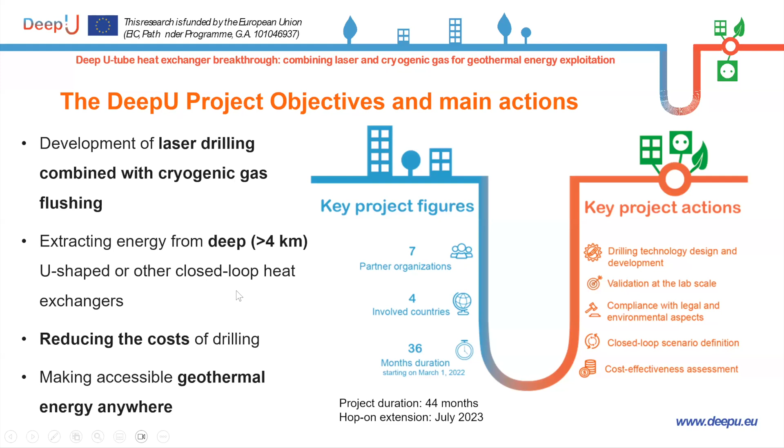The technology itself, you can see on this slide, is a laser beam which regularly gets refocused through lenses in the middle of a drilling shaft, which then opens up at the bottom to heat up the rock and to spall, which means heating up the rock so that it expands and goes into pieces. It will become clearer also in one of the presentations.

And then with the cryogenic gas, which is at the sides of the central tube of the drilling shaft, it's introduced to cool down and to pneumatically transport the drilled particles up to the surface. So this is, in a nutshell, the technology.

Since this is a non-mechanical, non-contact drilling technology, we expect that we would be in continuous drilling operation, contrary to conventional drilling, where you regularly need to trip up and down to replace the drill bit, which gets consumed by the drilling. This would improve the rate of progress on an hourly basis, and would also reduce drilling time and cost.

There is the possibility, which we are exploring, that through the heating of the walls of the borehole and the subsequent cooling by the cryogenic gas, we could form glazed layers, which in certain circumstances could avoid the need for casing, and through that also reduce time and cost. So this is, in a nutshell, the technology and the objectives.

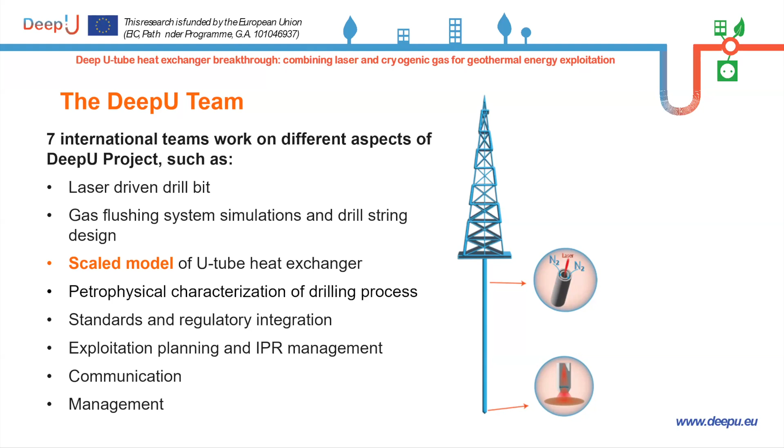The webinar agenda will be: after me, the first speaker will be Kevin Mallin, who is a very experienced person in deep drilling technology. He's been around since, I think, the 70s, so he has lots of experience, and we will cover the state of the art.

This is probably telling you what you already know, but mechanical drilling really relies on putting mechanical energy into a drill string to either churn up soft rocks or break harder rocks. So we apply weight, we rotate it, that breaks the formation into smaller particles or chippings. They are then flushed up the hole. We rotate the bits because we need a round hole, and we need to clean them, and those cuttings get moved to the surface either by fluid, air, or sometimes gas, and that leaves a hole in the ground, hopefully.

So the energy inputs are for lifting, lowering drill strings, rotating, motors in the drill string as well, pumping, compressing air, however we're going to do that system. So the one key outcome always is to make sure we're left with a usable wellbore.

Interesting, I was on a call yesterday with another drilling company, not for geothermal, and they were getting quite high rates of penetration, but their actual overall rates were quite low because they couldn't clean the cuttings. So we have to make sure that when people say 'we're drilling at 60 meters an hour', is that really what they're drilling at? Or are they really only drilling at 10 meters an hour? Because by the time they have to lift off bottom, clean the hole, do wiper runs to make sure the wellbore's clean - that's when we need to understand our rate of progress overall.

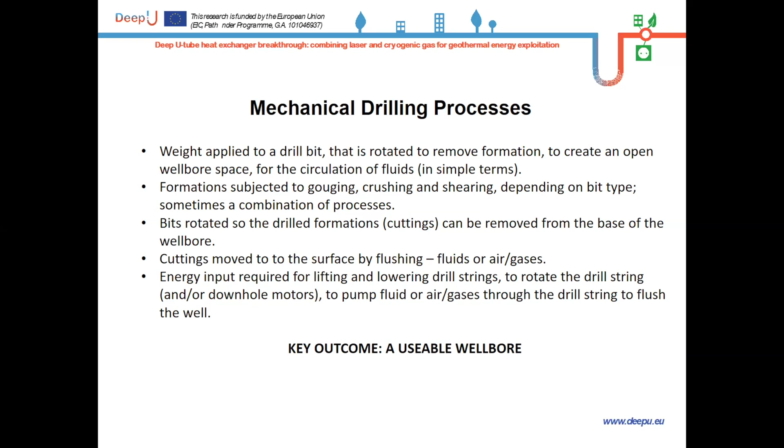Thank you, Antonio. The main drilling technologies currently - there are one or two oddball things around, but generally they're either rotary percussion, normally called down the hole hammers, powered by compressed air or fluids. There's the roller cones, which everyone's familiar with, the Hughes back in the early 20th century perfecting roller cones, and then the fixed cutter. The fixed cutter bit has been around forever - it was probably the first type used when we started making holes by rotating drill strings. We'll go on to talk about fixed cutters in a minute, because they've made a comeback recently in different ways. Next slide please.

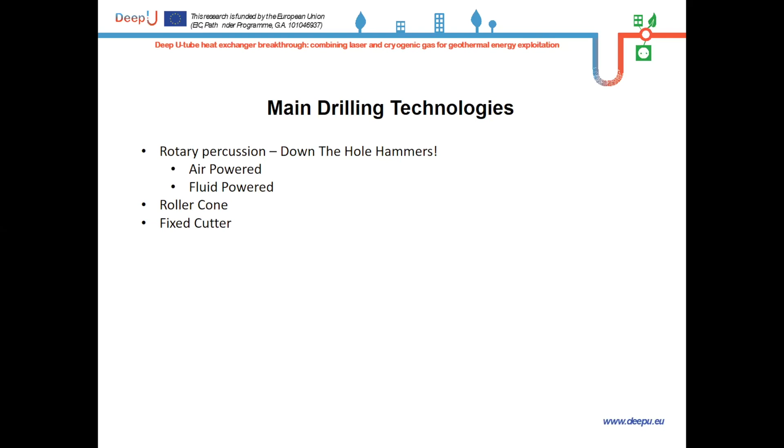Down the hole hammers have been around - Simon Ingersoll invented the down the hole hammer back in 1869, something like that. It's improved exponentially with the ability to compress air. The problem with compressing air is it's highly inefficient, very expensive, so you're quite limited economically to the depths you can drill. You're also limited by some formations - the weaker, less stable formations don't like being drilled with air.

So it's like everything - when we talk about state-of-the-art drilling, there's no one drilling method which will actually do everything. I often compare it to going out to play golf - you don't just take one club, you take a selection of golf clubs so you can play the ball depending on where it is on the course. It's the same with drilling. So it's not a comparative thing we're doing here - we're just showing you what is out there.

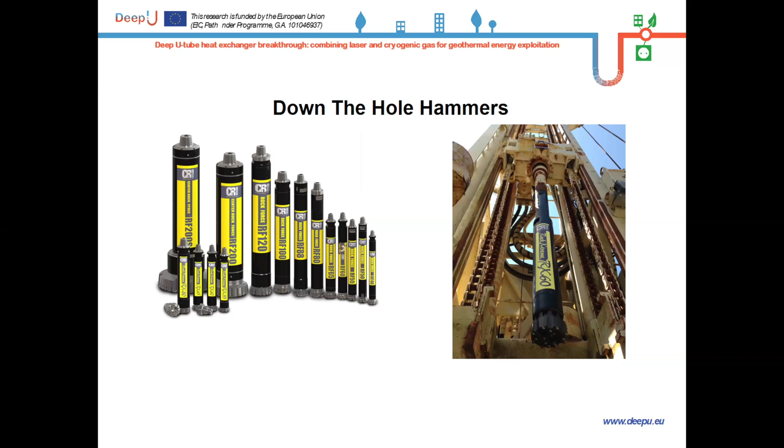These are all familiar down-hole hammer bits. These are Center Rock bits from our oil field days when we did a lot of drilling in the shale gas in northeastern USA. You can see the various shapes of the face - those are so we can direct air flush.

One interesting thing that's come about a lot recently is the increased use of computational fluid dynamics, so we can actually model the flows on these bits a lot better for hole cleaning. And that's not just the air hammer bits - you'll see it with water hammer bits as well.

When you see a water hammer bit, quite often you don't know they're any different. Some people, like myself, save money by using ordinary air hammer bits in water hammers because, for some reason, they are just cheaper.

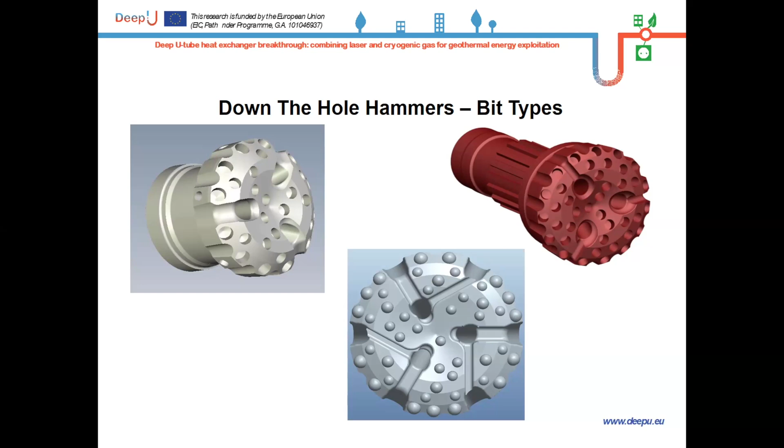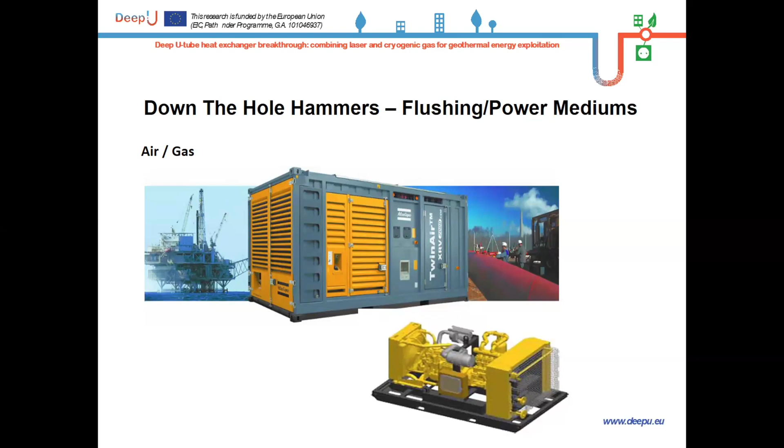It was originally developed because at LKAB in northern Sweden, who mine iron ore underground, the rock is very hard, and they also have lots of water in the mines. So it was developed around the idea: we've got a lot of water, let's compress water, let's look at how air hammers work, and then use high pressure water to power these hammers.

They are great, these water hammers are really very good. They drill very quickly, and they have very little vibration, which is a big issue for some of the smaller rigs. The downside is they want potable water - it's got to be very clean water, you can't have any suspended solids or sands, you can't put mud through them. We do run polymers through them, but even then it's not super efficient for water hammers.

The one thing we've used them for is offshore drilling quite a lot. In fact, on this major roadway on the west coast of Norway from Bergen to Trondheim, we've done lots of drilling offshore with these water hammers, where we just run seawater through them. Seawater isn't the best because it does have some suspended solids in it, but the rates of penetration we get with these hammers compared to conventional drilling methodologies, particularly in the granites up in Norway, offset the cost. So these really are almost single-hole throwaways - we drill the hole and then dispose of the hammer.

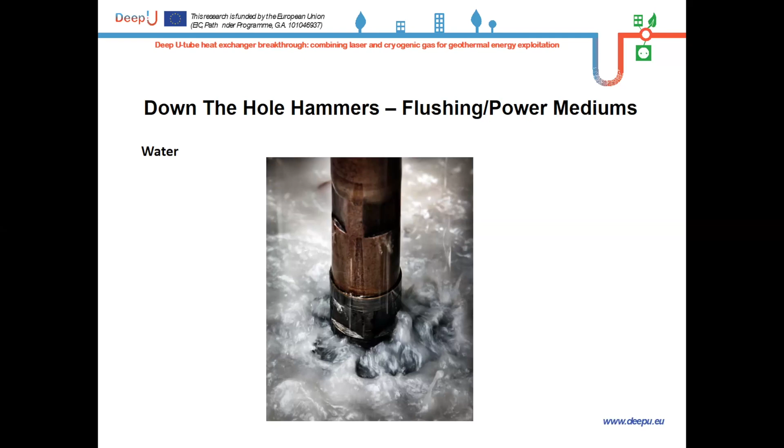There are a few other suppliers of water hammers now, particularly Numa hammers in the US, and Drill King, which is WAI out of Germany. So there's a lot of technology coming in around the water hammer. The one thing I will say is people are generally looking at smaller sizes because of the issue with needing clean water, so they've tended to concentrate on the smaller size hammers.

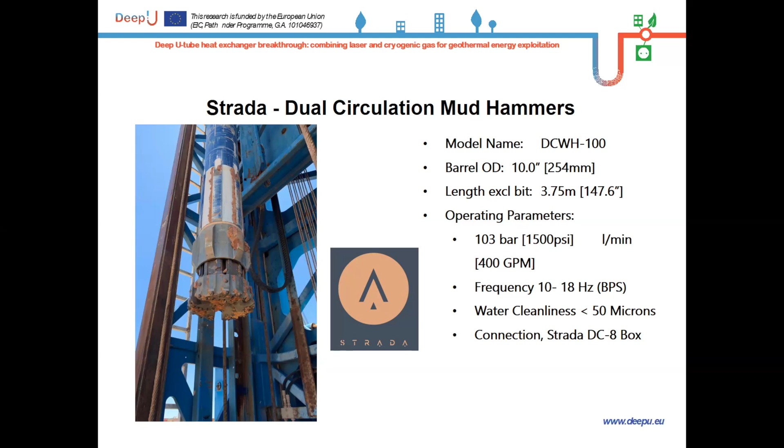The only real downside of it is that it uses a special drill string. Other than that, it's a great way of drilling holes.

This is a sort of hybrid between standard rotary and percussion drilling. They'll run a percussion bit on the end, and the system has a piston in there, the jarring piston, which adds additional energy to the bit.

Some years ago - the actual concept has been around for quite a long time now - Atlas Copco back in the day ran a thing called PARD, percussion assisted rotary drilling, where they took a down-the-hole hammer, machined special chucks so you could screw conventional rotary bits into them, and you'd drill with a tricone. They only used tricones with a down-the-hole hammer.

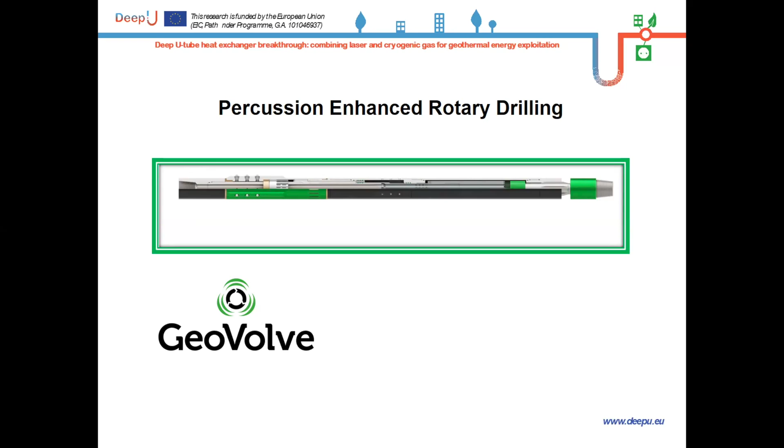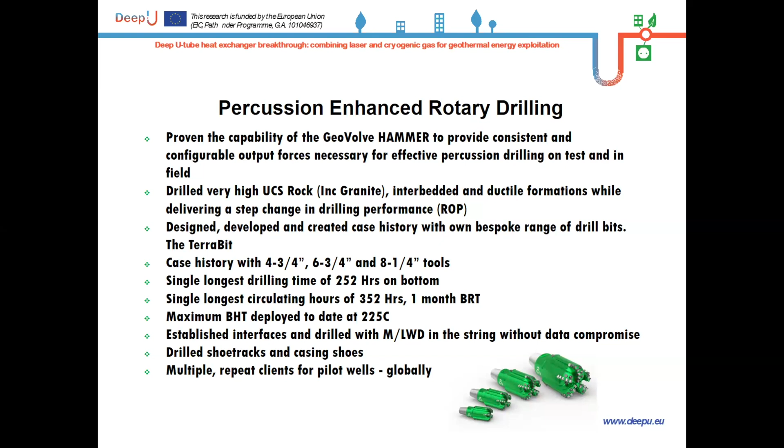Here we are - I hate to say it, but these, since Howard Hughes, way back in the day in Bakersfield, California, secretly worked on making these tricone bits, they are still very much used in our industry. So although we call them state of the art, it's stuff we've been using now for well over 100 years - almost 130 years now.

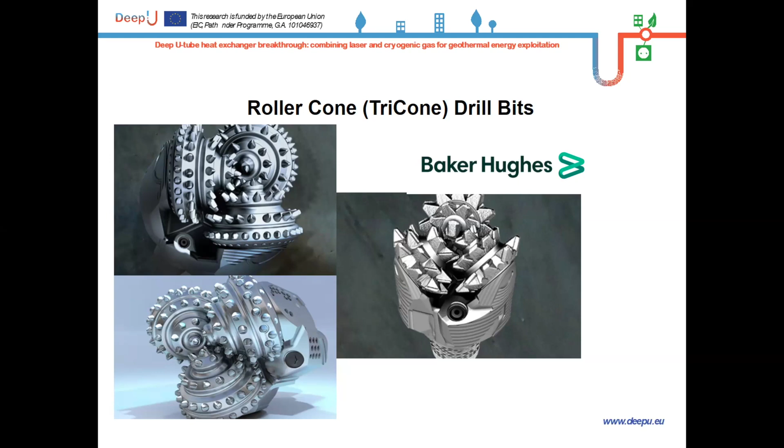Nowadays, with the increased way they're building these bits, it's allowed them to drill in very much higher strength rocks - granites in particular, in the Western USA - they've done a lot of work recently. I do hear lots of people say 'oh, this is new technology' - it's not new technology, it's old technology, newly applied, to be honest. So it has changed the way we're drilling granites.

But whether we see the overall efficiencies that we're going to see from systems such as the Strada mud hammer remains to be seen. These are still early days, probably 2 or 3 years now that we've been pushing these bits in a very different way.

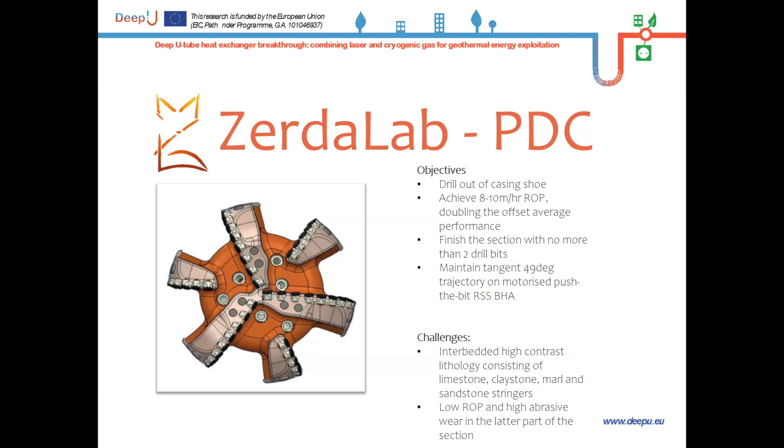So it's worth, on the deeper holes, looking at the PDC. And as I say, in Western USA at the moment, on the Forge project in Utah, and I think there's a hole going on in Oregon at the moment, which is quite high temperature, 350 degrees I think, they will be using PDC bits.

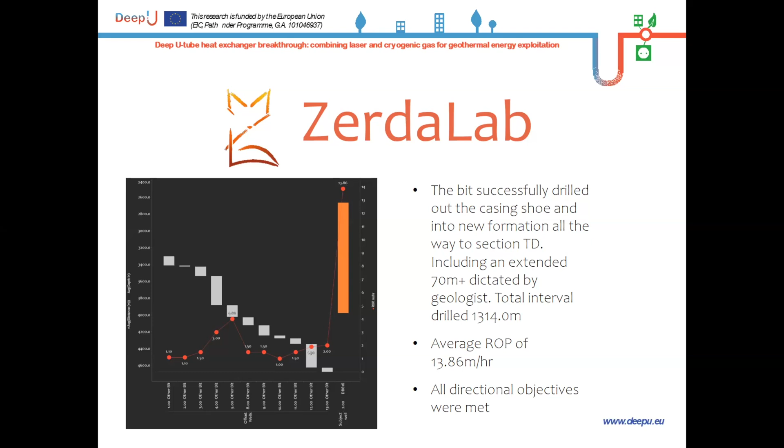That's just a slide from ZerdaLab showing a particular section they drilled. So ROP of 14 meters an hour, roughly, that's good. This is, when you hear about traditional drilling in granites, you're talking 1 to 3 meters an hour. And I know from jumping back to Strada, they're getting sort of around 10 to 12 meters an hour on some very big hole sizes as well. So in granites, it brings tears to your eyes.

Right, this is not actually a drilling technology, the sort of actual drilling technology that breaks rock. This is the RSS, the rotary steerable systems. This is really starting to revolutionize geothermal drilling in particular. It's been around for a long, long time in oil and gas. The RSS is a development of the directional drilling systems. You can actually steer this, it's like driving your car almost. You can take it wherever you want to go. And you'll see on the end they're using a PDC bit, like the one before. And we can go from vertical to long horizontals.

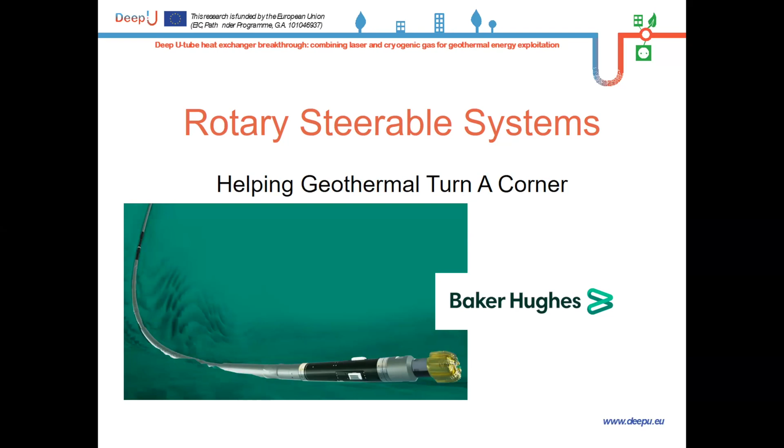This elongates the amount of rock that's exposed to the fluid that you want to heat and extract in a geothermal system. For those of you interested, there's a company out there called Eavor Technologies, and they are running what they call this underground radiator system, where they're drilling lots of very long horizontal sections and linking them all together so you have sort of long tubes. They are using RSS.

One thing, it is an expensive method, so you have to consider it as part of your overall drilling program. So that covers off where we are with the technologies. They're not all of the technologies, we don't have time, and we could spend probably a day talking about each individual one as we go. But those are the key ones: we're still using roller cones, we're still using down the hole hammers, either air or fluid, and we're now reutilizing PDC fixed cutter bits in harder formations.

So that covers off those sorts of technologies. And now we go into the non-mechanical. I'll be honest, there's no commercial non-mechanical technologies. I mean, there are companies doing some drilling, but no one's drilled to great depths, and I'd say over 200 or 300 meters yet with these non-mechanical technologies. All the ones we've been talking about, they've existed since the late 1960s, but they're still not fully commercial. There's been a lot of research, and I'll show you in a minute some of them. But how they leave a hole in the ground is still quite debatable.

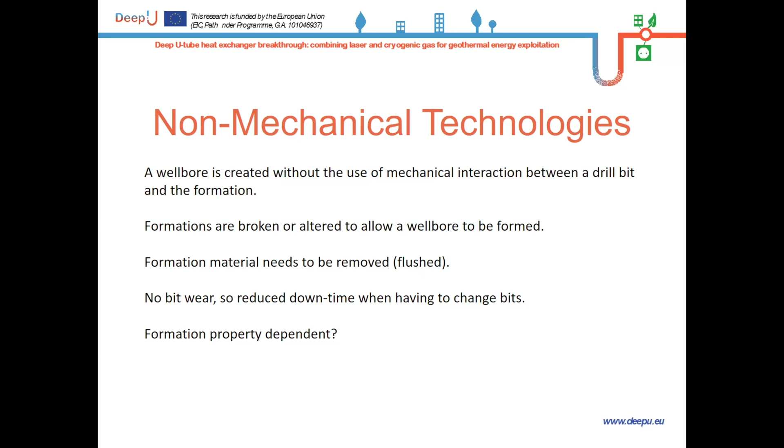Right, these are in no particular order. Electro-pulse boring, this is where you put a high voltage shock and pulse it into the rock, and it fractures the rock. It's a bit more technical than that, and I'll introduce you to a paper in a minute. There's a plasma technology from a company called GA Drilling, which stands for Geothermal Anywhere. Hydrothermal spallation, and super deep fusion drilling, which I have no idea what that means.

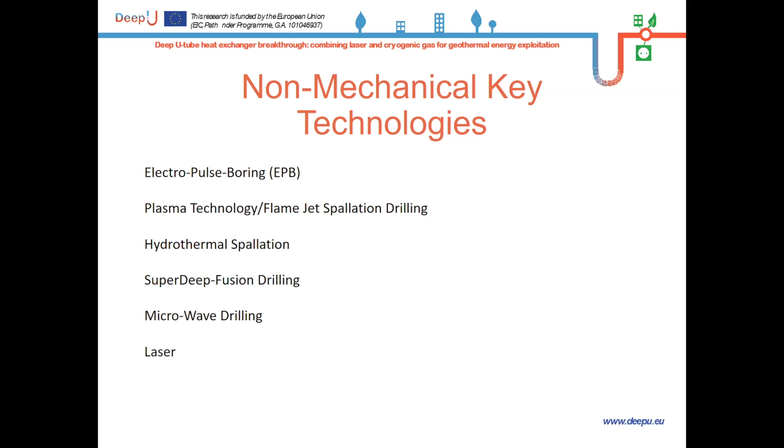Couldn't find anything on it, but it was mentioned in a paper in 1968. The microwave drilling, this is being made quite topical by Quaise Energy, who are planning to drill their 20-kilometer deep wells in 100 days. And then, of course, we've got the laser, which Pavel will talk about in a few minutes.

Next slide, please. So there's a reference there to a paper which talks through what electro-pulse boring is. They have drilled quite a few holes now to around 200 meters. The interesting thing is they're drilling quite large diameter wells, at 500 millimeters, or half a meter diameter. So going deeper with electropulse boring could be very interesting because it can drill quite large holes, and you can then flow much more fluid through these wells with lower pressure losses.

And that's it - it applies an electropulse to the formation and hence energy. Once you impact energy into the rock, it will change the status of the rock, break it up, and then you have to flush it away.

But I do urge you to search out and find that paper. It's open source now, so take a photograph of that, search it on the internet. It's very, very interesting. I think the paper is from 2012, a cooperation between some folks in Norway, Germany, and China, I think. It's well worth reading, because like everything, if it works, it's going to be an amazing step forward. It's a long way from working yet commercially, I think.

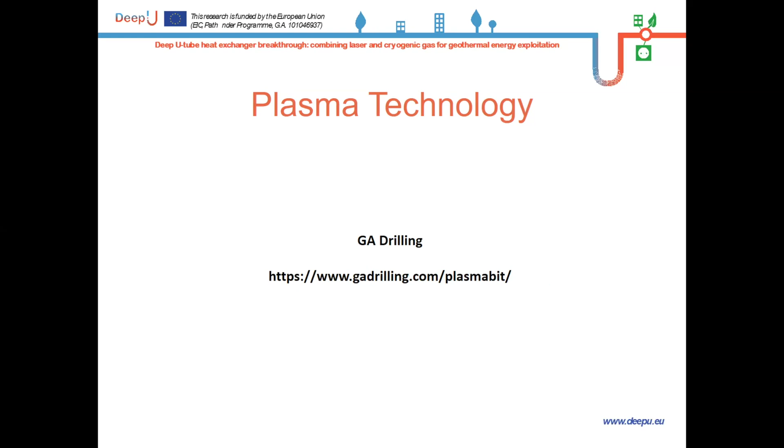Thanks, Antonio. Next, then the microwave - I just copied this verbatim from the Quaise Energy website. So they're using a gyrotron-powered drilling platform, and they evaporate the rock. So read into that what you will. They have been talking for a few years now about how they're going to drill some very, very deep wells, 20 kilometers, in 100 days, which would be very, very impressive.

There's lots of things we also have to consider when drilling much deeper - all the geomechanics of the rock, how the rock behaves when you drill a hole into rock that's being compressed under 12 kilometers of other rock. What's going to actually happen as you go into these much deeper formations.

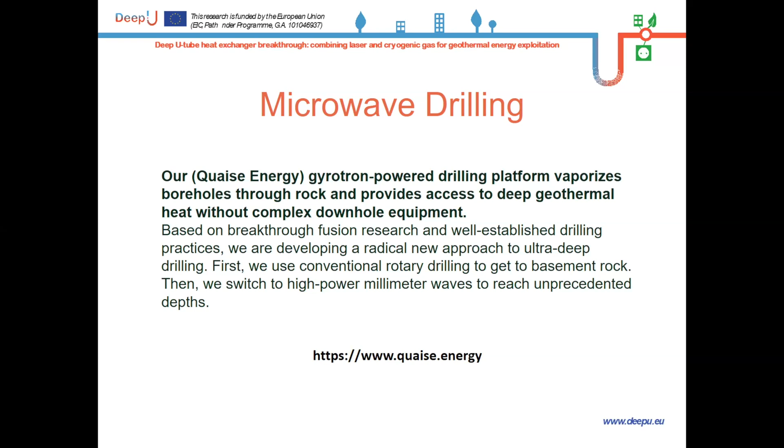So as you see there, what they're doing is they're going to actually use conventional rotary drilling to get to basement. That could be anywhere - say in Cornwall, some of the basement is at surface; in the Baltic Shield in Scandinavia, it's at surface; other parts of Europe it can be at sort of 3,000 to 5,000 meters below the surface. So when they say they're going to use conventional drilling, that depth range could change from 0 to 5,000 or 6,000 meters.

So again, just go onto their website and take a look. Then we come to laser drilling, which is what today is really wanting to look at, and the work that DeepU are doing, and the reasons why we're looking at lasers - because as we go deeper, there's going to be a need to try and avoid using mechanical drilling methods, because of the physical restraints we have with wearing things out.

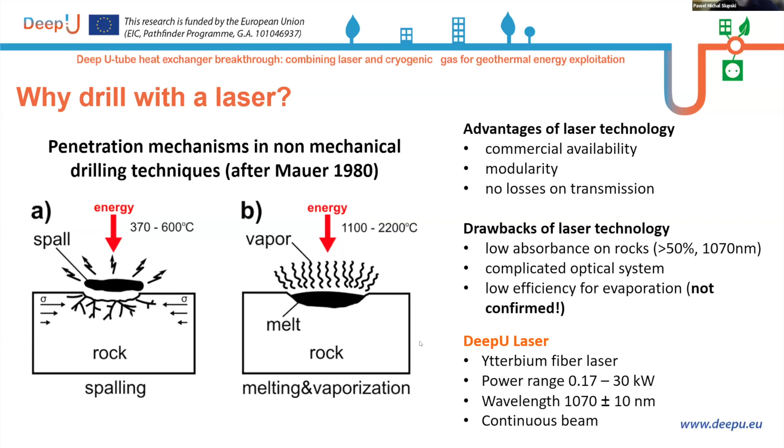What are the main laser-rock interactions, and what they depend on for geological materials such as rocks? We have absorption and reflection, the most important parameters, as the ratio of those two controls the amount of energy actually being absorbed by the rock that can cause interaction. In case of granite, we have around 54%. There are, of course, secondary processes—scattering, transmission—but they do not play such a significant role in laser drilling.

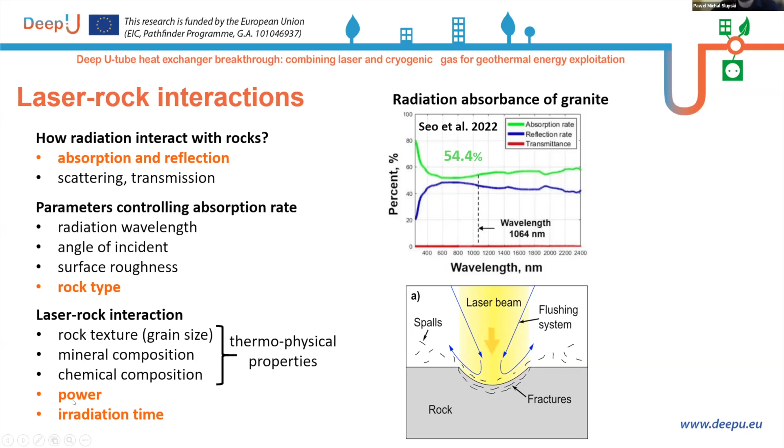Those parameters we can describe, but we cannot do much about them. What we can control is the power and irradiation time, so we were mainly focused on better understanding the impact of those two parameters.

To understand how rocks interact with a laser, we designed three types of experiments: linear laser tracks, which basically performed constant irradiation alongside the track while increasing the distance, effectively reducing the power density delivered to the surface, so we could observe its effect on the rock as the power density changed.

Then the punctual tests were mainly focused on understanding the effect of irradiation time on laser drilling, and finally DeepU drill head tests—tests that we planned to solve the technological and technical problems of perforating the rocks.

The lithologies we selected can be divided into primary lithologies such as granite, sandstone, and limestone, which we investigated heavily with various experiments and techniques, and also characterized the rocks themselves. And secondary lithologies such as gneiss, basalt, slate, and migmatite, which were used to verify very specific aspects of the interactions, and hopefully in the future we will also study them more.

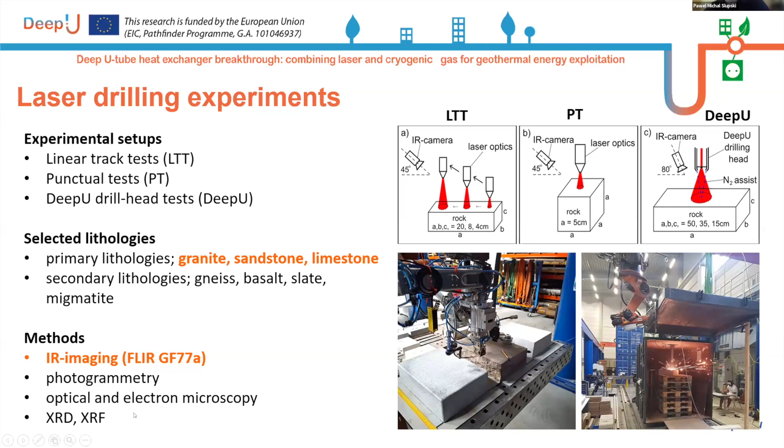The methods we used to investigate were infrared imaging and thermocamera for monitoring the laser drilling process, and for further understanding of the outcomes, we used photogrammetry to study the morphology of the craters, and generally for lasing products, optical and electron microscopy, and for chemical and mineralogical composition, X-ray diffraction and X-ray fluorescence.

So here we can see generally some of the results and outcomes of the linear track tests and punctual track tests, where we could observe the phenomena occurring depending on the power density, power, and irradiation time. What we expected is initially the spallation starts, then we move to the melting regime, and finally we can see the vaporization of the rock.

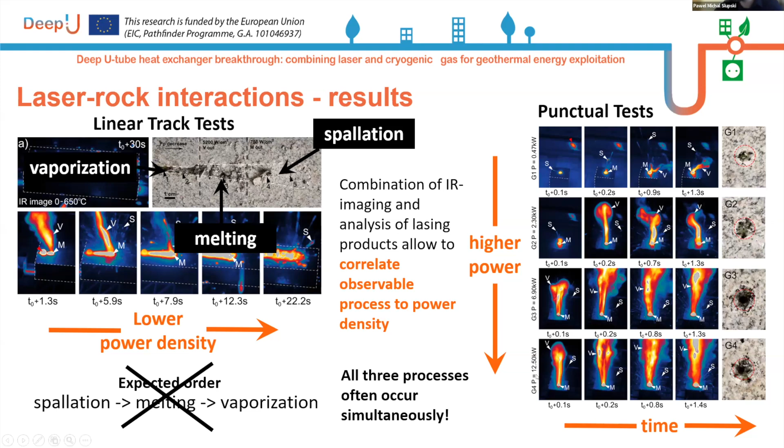However, we could notice, which is also well pronounced on the lasing product, well consolidated glass within the vaporization region. Then we can see some melting evidence. And as we reduce our power, effectively power density, we can see only spallation. However, close examination of the infrared imaging has demonstrated that all three processes often occur simultaneously, to different intensity.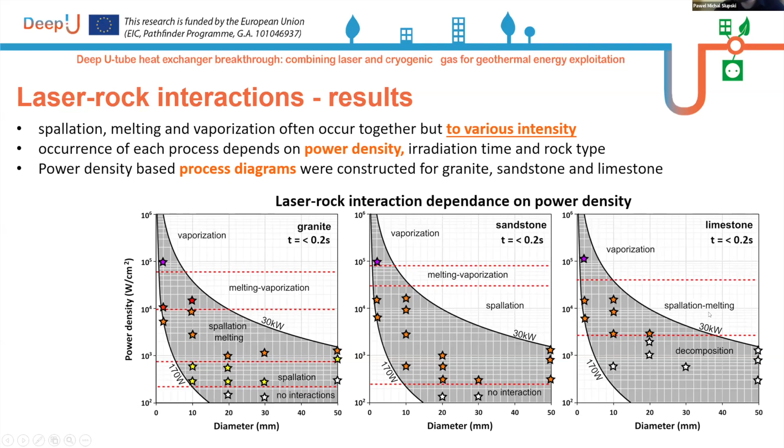What we can see here is that generally granite is relatively easy to melt. We can see that our quartz-rich sandstone generally spalls even at very high power density, while limestone needs much more power density even to initiate the spallation, and at higher ranges, melting.

So what are the implications of these process diagrams? They are actually the possibilities of application of lasers to drill useful boreholes. For instance, at the moment, we managed to drill approximately 10 centimeters. We are able to drill around a 10 centimeter borehole within this range, as we can see the black line that corresponds to our current maximum power output.

And therefore, we are planning to increase the power to 120 kilowatts, which will allow us to drill with thermal spallation. In that case, the diameters go to around 20, even higher. However, when we consider the melting vaporization process, as we can see, even at extremely high powers, such as 1 megawatt, it will be very difficult to drill useful diameters with a laser.

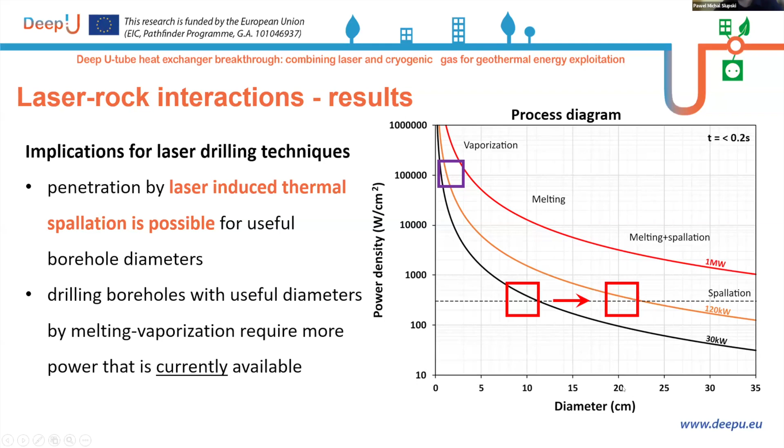So at the moment, the melting and vaporization require much more power than is available. Therefore, we cannot expect soon to drill useful diameters for geothermal purposes.

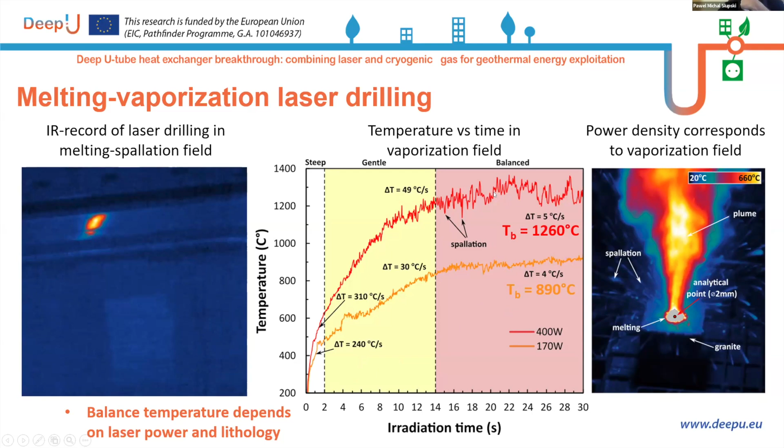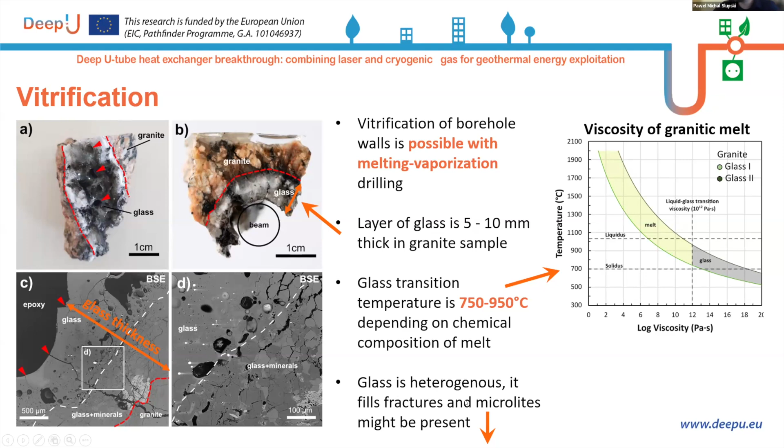As mentioned, it's heterogeneous, so not necessarily completely homogeneous. It may contain relics of unmolten phases, as we can see in quartz. This melt often fulfills and completely fills the fractured zones still present in the rock, basically sealing and improving the porosity. It might also contain solid phases that crystallize during quenching, such as microlites, in that case magnetite. The main question is what are the mechanical properties of such a laser-generated glass?

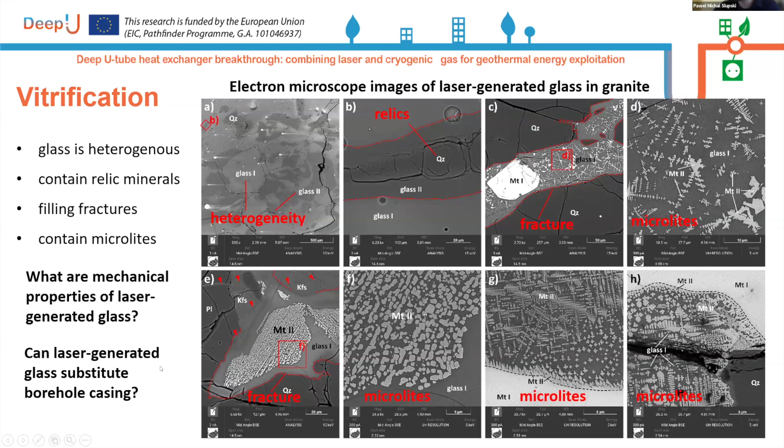We still haven't investigated that, and whether laser-generated glass can substitute borehole casing. As we know, glass is known for its very high uniaxial compressive strength. However, due to its complexity, it's very difficult to model, so we would try to address this question in the future.

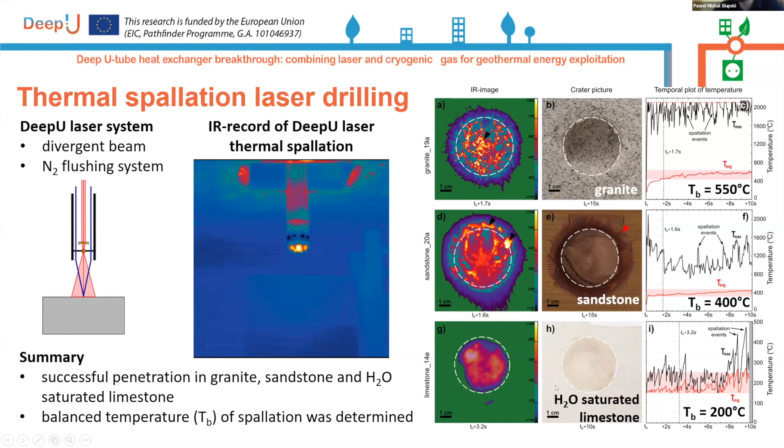It's important to notice that, according to the previously shown diagrams, we lack the power to activate or initiate thermal spallation in dry limestone, which leads to subsequent melting and very low penetration. Therefore, we tried with H2O-saturated limestone, and we were able to thermally spall it at a very low average temperature.

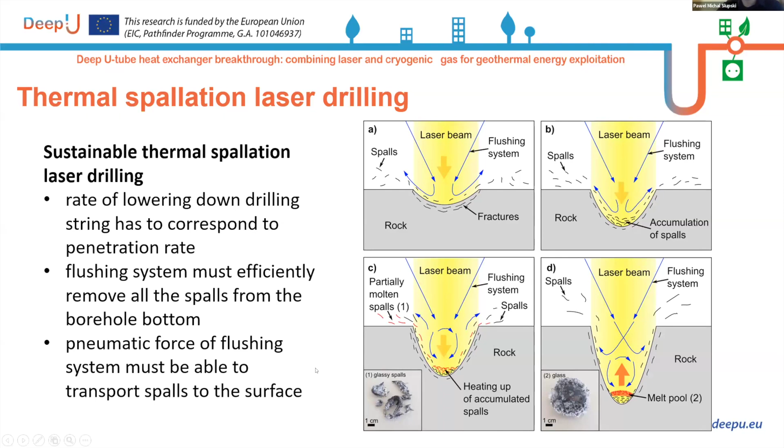How to sustain thermal spallation and stable penetration? The most important aspect is basically the efficient flushing system, as drilling with thermal spallation usually demands drilling at the highest possible power density. Therefore, if particles are trapped at the bottom of the drilled borehole, they may eventually melt, leading to formation of glass, or in extreme cases a melt pool at the bottom. This liquid form is highly reflective for the radiation, and basically changes the drilling regime from thermal spallation to melting, effectively stopping penetration via thermal spallation. So that is the importance of the flushing system.

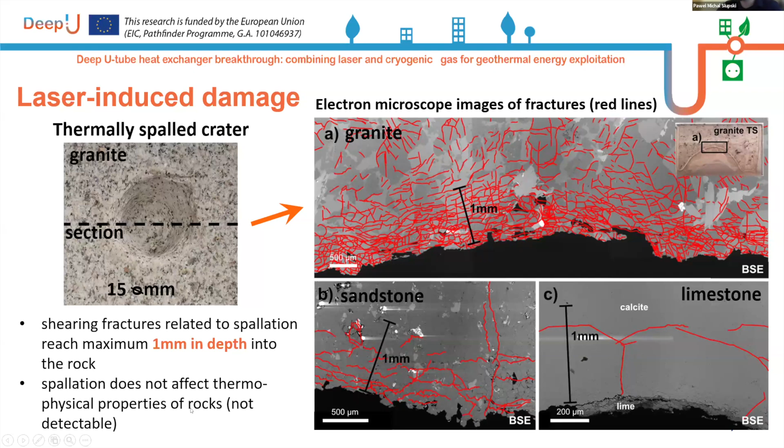What actually happens with the rock itself? I said that macroscopically it's a very clean cut. However, under the electron microscope, we can see a number of shearing fractures generated very close to the crater surface. Here we can see the bottom of the borehole in granite, sandstone, and limestone, and we can see those shearing fractures parallel to the borehole walls reach a maximum of 1 millimeter in depth into the rock. Therefore, thermal spallation does not affect the thermophysical properties of rocks, or at least we were not able to detect such a change with our current instruments.

A few words about the efficiency of laser drilling. We used some parameters: the rate of penetration, defined by the depth of the borehole divided by the irradiation time, and also specific energy, power multiplied by irradiation time per volume of rock removed. In that case, we have to underline that this specific energy can currently only be used for fiber laser drilling, as it wasn't normalized and corrected for the absorbance-reflectance ratio, which I mentioned in the beginning.

Looking at our experiments performed for thermal spallation with a 5 centimeter diameter borehole, we can reach a rate of penetration around 10 meters per hour for granite, around 15 meters for sandstone, and for wet limestone around 5 meters per hour. We see a very significant drop for dry limestone. As I mentioned, it's related to not sufficient power to initiate thermal spallation. Therefore, we have melting, much higher specific energy, and low rate of penetration.

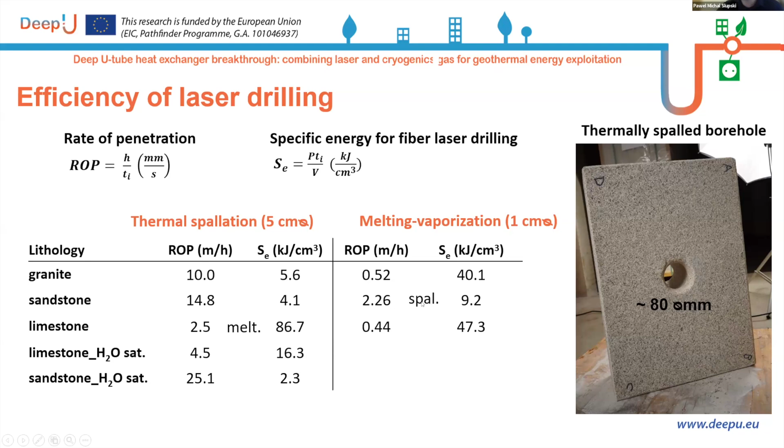So quickly, to visually summarize our results, we have laser drilling that may work in two different regimes: melting vaporization and thermal spallation. Therefore, we can propose two different setups or technological solutions: thermal spallation, which we currently can successfully apply for drilling purposes, and melting vaporization, which is probably a matter of the future, as we need significantly more power to drill larger diameters. However, both techniques have their advantages and disadvantages, such as the vitrified layer for melting and a very high rate of penetration for thermal spallation.

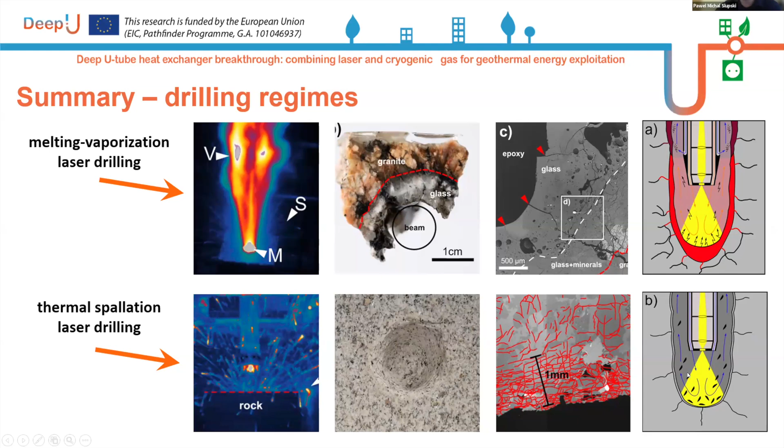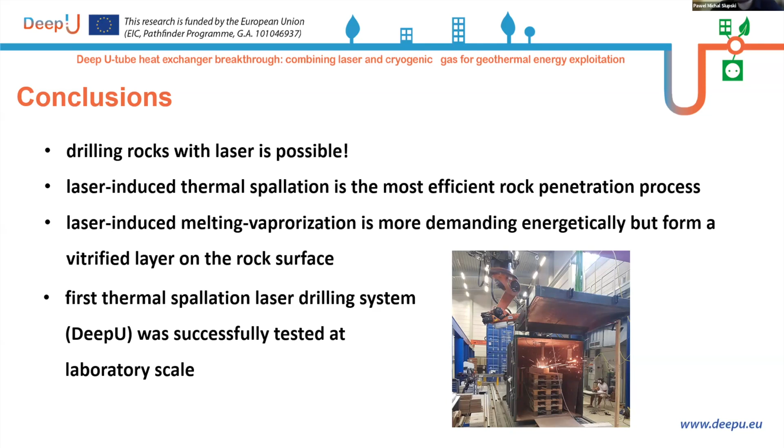So the main conclusion, answering the title question, is that drilling rocks with laser is possible. It's not anymore science fiction. However, at the moment the main regime is laser-induced thermal spallation that provides rock penetration, and melting vaporization is much more energetically demanding. However, it can form a vitrified layer that could work as casing in the future for some selected lithologies. We have successfully tested the DeepU laser drilling setup at laboratory scale, and we're looking forward to continuing this work in the field and further developing the drilling system.

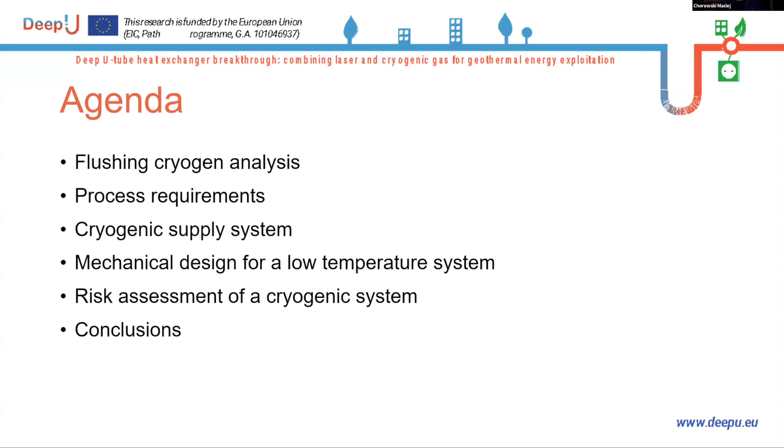I will try to make my presentation short because it follows some suggestions and conclusions from the previous ones, which were very informative. First of all, we would like to focus on the laser drilling cryogenic system, with a short discussion concerning why cryogen, what are the process requirements, how to design the process of cryogenic supply, what are the mechanical challenges, and finally what can go wrong in such a robust but nevertheless still complicated system as we would like to propose.

First of all, to be efficient with flushing—and Pawel stressed very strongly that it is very important to remove all the cuttings from the bottom of the borehole—we have to supply fluid and we have to remove it. After some basic considerations concerning the thermodynamic nature of the flushing fluid, safety of the operation, and chemical stability of the compound to be used, we decided to go for cold nitrogen, cryogenic nitrogen, chosen as the most suitable candidate for flushing medium. This means that from the surface we have to deliver cryogenic nitrogen down the borehole, up to several kilometers, turn its direction, remove heat, remove the cuttings from the bottom, and take them to the surface. So it's a multi-purpose task for this cryogen.

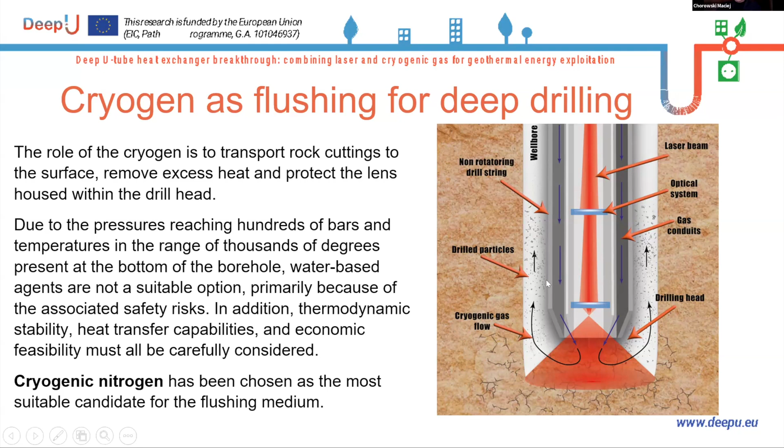It's not only the nitrogen that was chosen, but it also has to be decided what should be the entrance parameters of this gas. Taking into account that we first have to have the flushing medium with a sufficiently low temperature to accommodate heat, the direction is cryogenic. Cryogenic means a temperature of something like 120, maybe even less, Kelvin—in Celsius, minus 150 or even more. Liquid nitrogen could be a good choice, but it will not be possible to keep it in this two-phase thermodynamic state if the pressures exceed about 30 bar.

We can expect such high pressures, or even much higher, down the borehole due to hydrostatic pressure and due to pressure drop in the return channel. So the only reasonable choice is supercritical state.

Supercritical means single phase, high density, low temperature, but not well defined, because as a single phase we do not have a stable temperature—if we add some heat, it will go up. So supercritical is not a point like state, it's rather a region, and we see that we go towards higher pressures, even several hundreds.

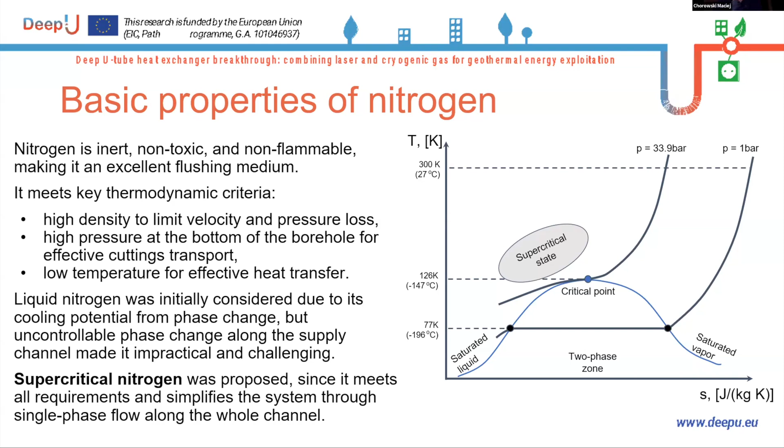So supercritical nitrogen was proposed since it meets all requirements and simplifies the system through single phase flow along the whole channel. We do not have to use phase separators. We do not care for two-phase flow, heat transfer coefficients which are difficult to identify for two-phase flow, or two-phase flow pattern. We go for a simple system, but nevertheless, from a technical point, very challenging.

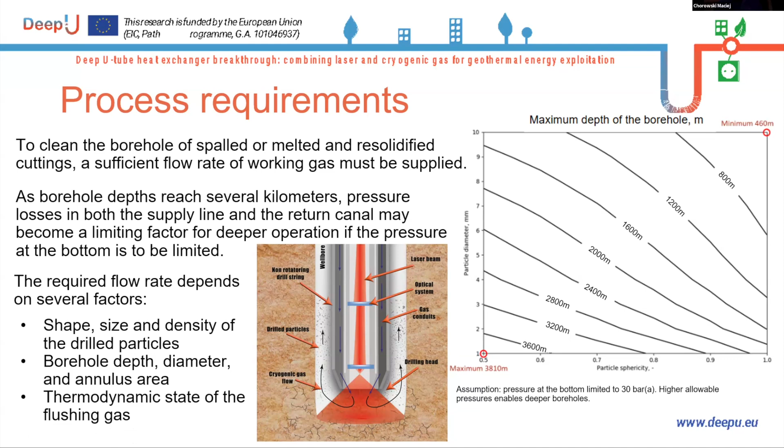So that is to demonstrate that we control the required amount of nitrogen to be circulated through this system with respect to the nature of the cuttings that are to be removed, and also with respect to the diameter and depth of the borehole.

And well, it has been demonstrated by modeling that supercritical nitrogen is essential to maintain an adequate mass flow rate despite significant pressure drops in small process pipes, and to prevent the formation of two-phase flow. So it seems that it should work even for very deep holes reaching over 4,000 meters.

Nevertheless, as in any modeling, we had to take into account many assumptions. We have decided to construct a dedicated test rig to test the model. Here you see the warm part of it. It will be used—or it is now under final stage of commissioning, so it is already in use—to check first of all the transport properties of debris, of cuttings, and to check if the model is adequate and can be used as a reliable source of information on what is a really required nitrogen flow through the system. So our methodology is to model, to calculate, and to validate the model, at least for the basic input parameters.

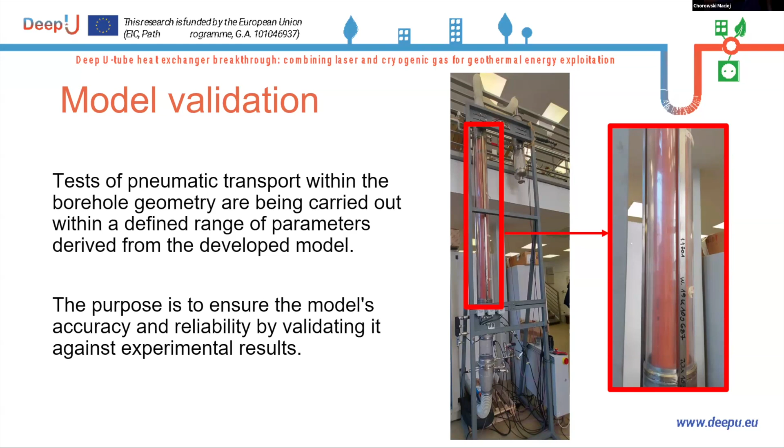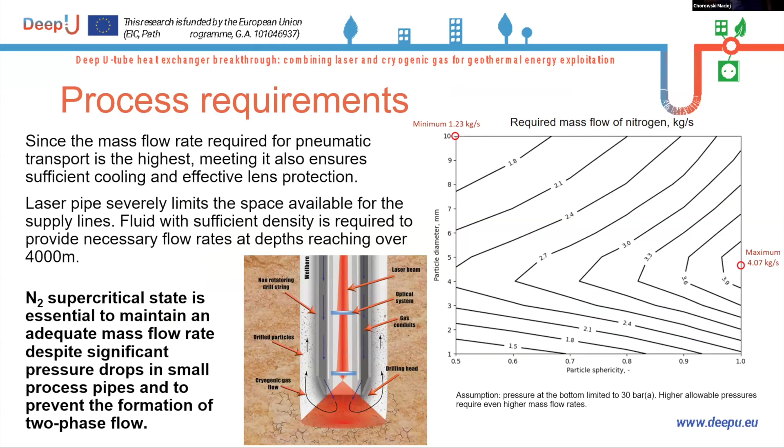When we look at the cryogenic system, it starts from the source of liquid nitrogen, because what you find on the market is liquid nitrogen. We remember that we are not talking about peanuts, because we will require something like 3, 4, or 5 kilograms of liquid nitrogen per second, which means tons per hour and tens of tons per day. So it must be an industrial system. We supply either from a separation unit or from delivery by trucks.

We store it in liquid form. We compress to the required pressure by a cryogenic pump. As we compress the fluid, it is not a high energy consuming device—roughly speaking, we consume something like between 5 and 10% of the energy that would be required to compress gaseous nitrogen. So we save energy because we compress the fluid.

It is still at low temperature if this compression is in adiabatic condition. We go to the drill string and down with this supercritical nitrogen at a temperature of about 120 K with pressure. We have calculated that having very deep boreholes, and having to assure sufficient nitrogen to remove the cuttings and sufficient to withstand the pressure drops during the return in the return channel, we can expect working pressures up to 350 bars. So a high pressure, relatively high pressure industrial installation.

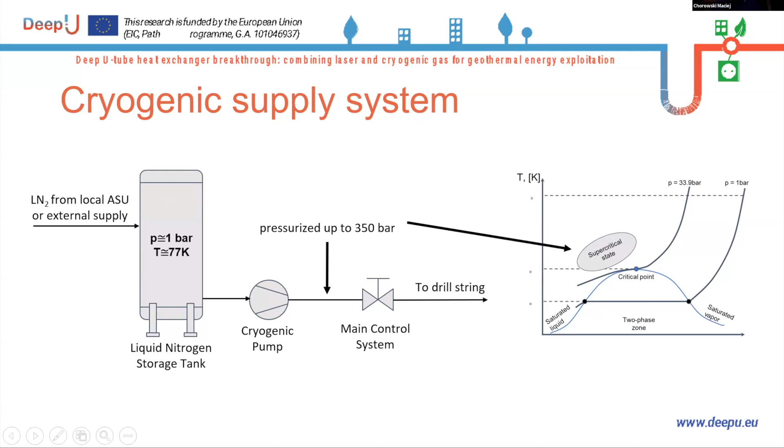And now we are coming to the basic technical challenges and some innovative solutions that have to be proposed in cryogenic engineering, because it is not a big amount of cryogen to be supplied—something like kilograms per second.

We have it in industrial applications. The length of the transfer lines of kilometers are also not exceeding the state-of-art technology.

But what is completely new here is that we are going down the borehole. So we have to use the channel, denoted as blue line, supplying high pressure nitrogen, robust with sufficient mechanical stability. It is proposed to be a spiral one, so self-compensating. We avoid the necessity of using bellows.

We are not able to avoid it in case of laser beam pipe with optics, due to different thermal contractions depending on the temperature. The return annulus channel will be separated thermally by vacuum insulation. So we have to incorporate high mechanical stability of the input channel, vacuum insulation, and a return channel with the ability to take the cuttings.

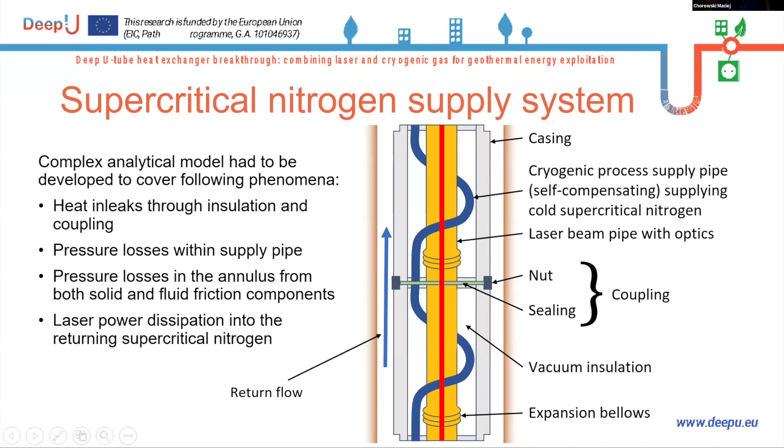And what is, I think, the most difficult part of this proposal is the coupling, because to go down several hundred meters or even several kilometers, it would not be possible with a single piece of pipe. So having it sectorized, we have to use several tens or even several hundreds of couplings along the borehole. The coupling should be robust, tight, easy to fix, not very sophisticated, so as to stay reliable.

If we would like to summarize the challenges: we have to withstand low temperature, materials must retain their key properties even at cryogenic temperature. So we are limited to some categories of materials that can be used, roughly speaking, for the temperatures characteristic for liquid nitrogen or supercritical nitrogen.

We have to cope with heat loads. So the design should minimize direct and short connections between cryogenic and room temperature components. Especially, we have to insulate and reduce to minimum, perfectly to zero, heat flux from the beam pipe to the supplied nitrogen. We have to use vacuum insulation because it was not possible to find a sufficiently low conductive material to fulfill the requirements.

So we have to go to the vacuum insulation. We stay with vacuum insulation. It will be vacuum powder insulation. Nevertheless, we have to guarantee vacuum along the pipe. We have to withstand mechanical load because of significant pressure and self-weight of the system. And finally, it should be economically feasible.

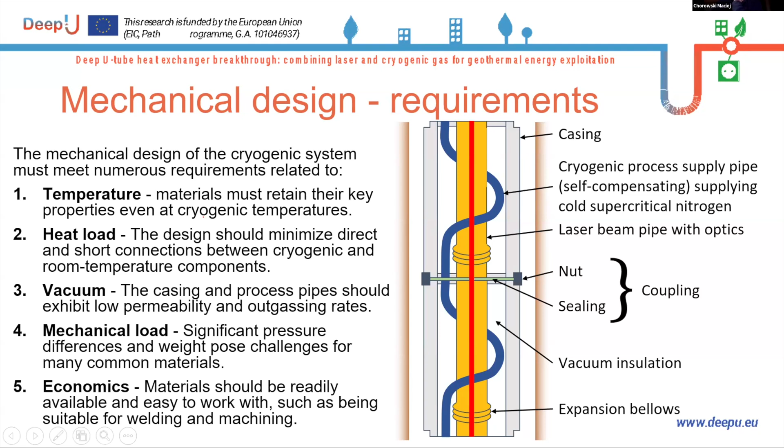We also have to deliver electricity down the borehole, so we have to design electrical feed-throughs which will be both tight and robust. We have to guarantee fast coupling and sealing with some special system of sockets. We believe we should be able to propose leak-tight sealing feasible for cryogenic temperatures and for such a robust system.

The system should be characterized by mechanical strength. It should be possible and usable for fast and robust assembly, and characterized by low thermal load to preserve the low enthalpy of the incoming gas, making it a suitable cooling medium and later, after some warm up, a good medium for pneumatic transport of the cuttings to the surface.

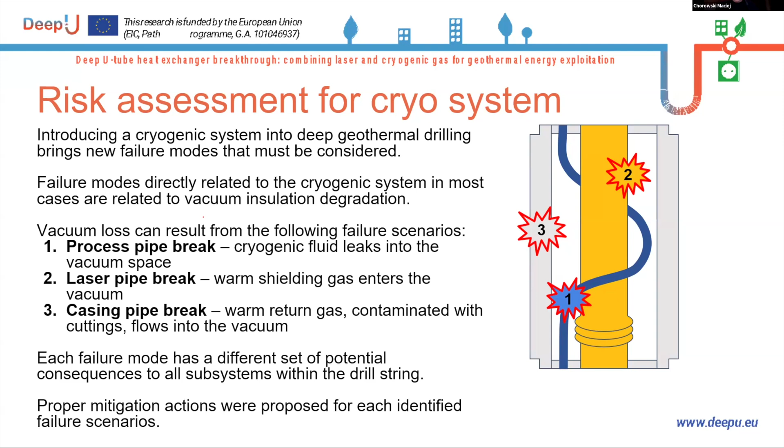Coming to the conclusion, we believe that cryogenics technology, materials, and procedures are well prepared to deliver cold nitrogen down the deep borehole. Thanks for your attention.

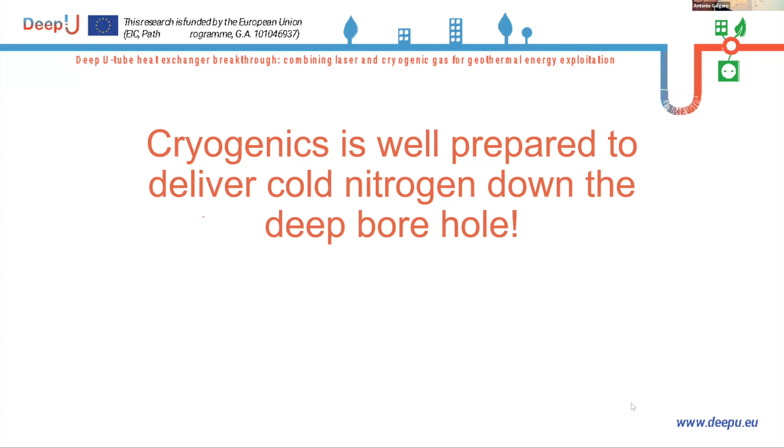Thank you, Maciej. Very interesting. A lot of problems are solved, but others in the next months, I hope. We now go to Riccardo Pasquali from GeoServ, Ireland, regarding the environmental regulatory aspects that complete this webinar.

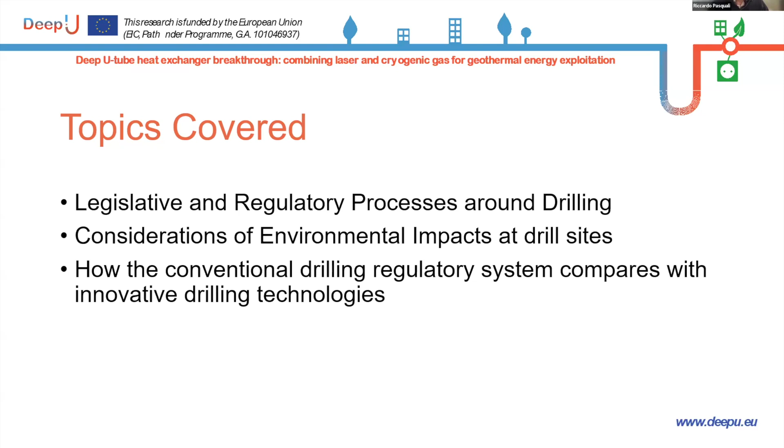What we wanted to do was first look at the conventional methods of regulating and legislating for deep drilling operations, looking at the systems and processes associated with that legislation and regulation, and compare those with what you've heard today about the new technology solutions, to see broadly whether it fits, or whether some changes in our processes are required in order to

basically allow us to progress to the next stage. So to frame the context of the discussion, all of the partners in the project were really interested to try and understand what aspects a regulator or legislator of drilling operations would want to focus on in terms of the DeepU technology.

As you've heard this morning from both Pavel and Professor Chorowski, there are some significant innovations in the actual process of DeepU drilling compared to what's out in the market. There are some fundamentally different EHS risks associated with managing the processes of both the laser drilling and the cryogenic system, which need to be considered.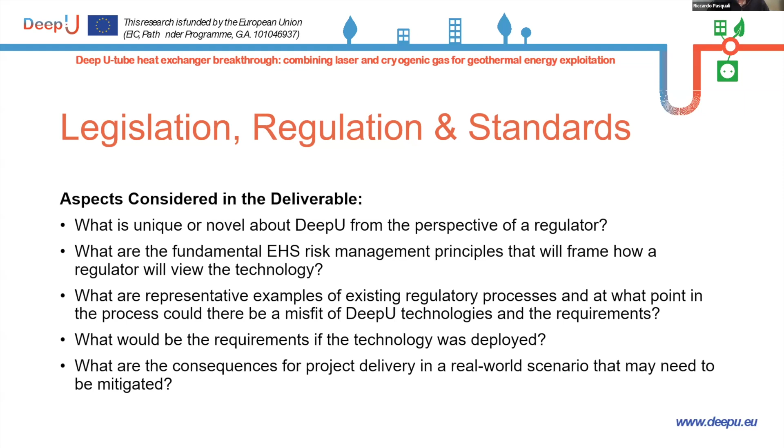We wanted to understand, if we were to present this technology to a regulator, what would they be looking for in terms of gaining acceptance for the technology, and what would be required to implement it and bring the technology to the field in real scenarios, on real drill sites.

So, looking at the technology developments and then comparing those with high-level compliance challenges in terms of legislation and regulation principles, to see if the technology could actually be used out in the open market.

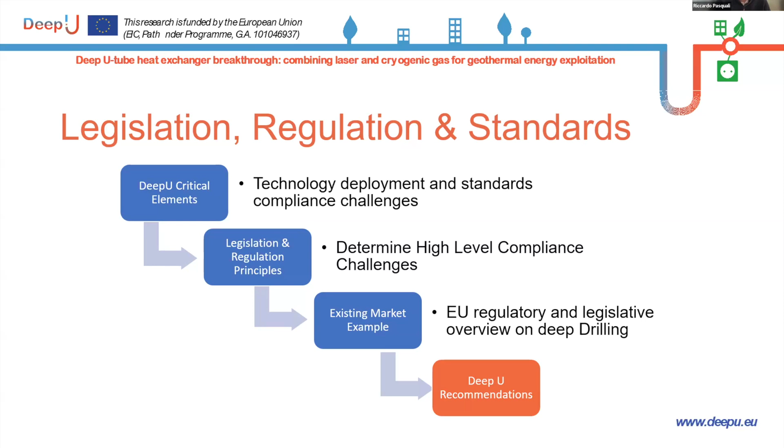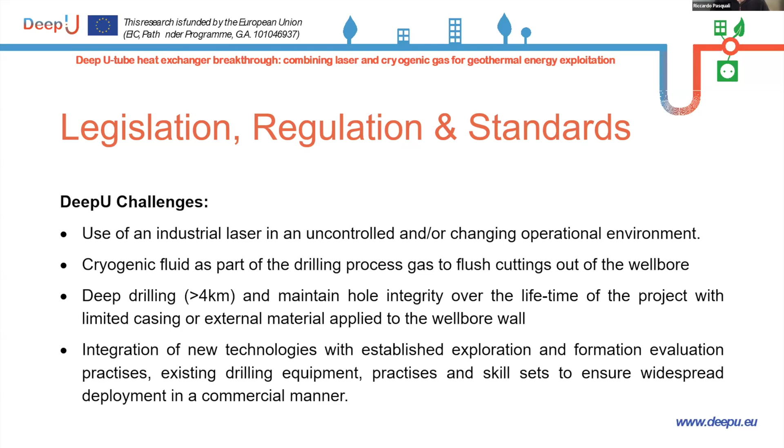Then the third aspect, which is actually really important and the consortium have been doing quite a lot of work on, is trying to understand how you maintain hole integrity and how the borehole at great depths would perform over the operational lifetime of the system. The fourth challenge is trying to integrate all of these aspects into existing drilling equipment, practices, and skill sets, looking at the broader drilling market and understanding how DeepU could be integrated.

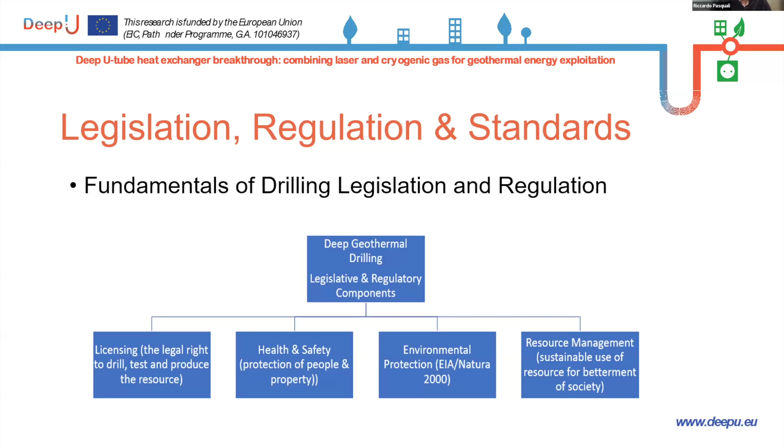So you have your licensing requirements on the left-hand side. You obviously have to comply with health and safety regulations and requirements. There is environmental protection for the drilling operations, and then the lifetime of the system. And then during the operational phase, once you've effectively completed in terms of the geothermal resource, you also have to have a resource management plan, so you need to demonstrate how your system would perform in the long term.

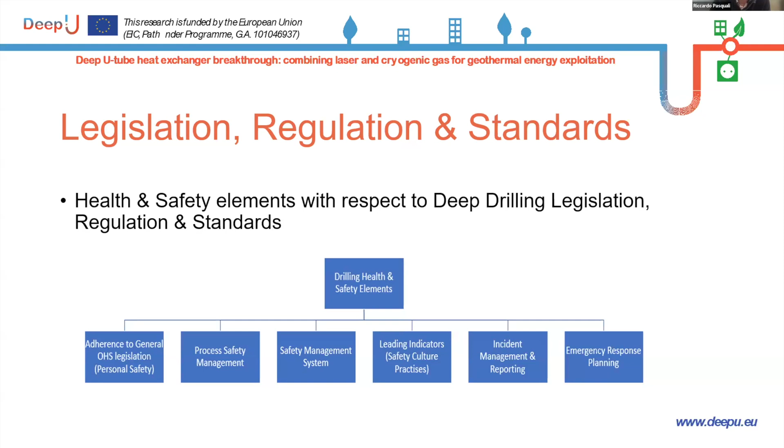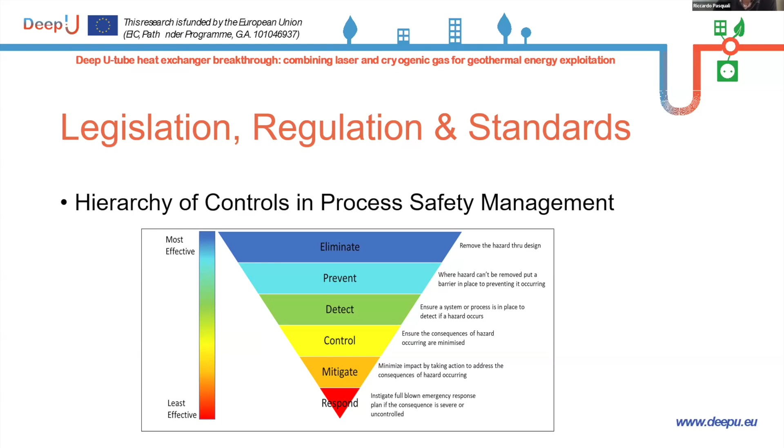Effectively this is a pretty standard tree across many jurisdictions, and it's all based on a hierarchy of controls for safety management, which starts with eliminating hazards early on in the design process, and trying not to get to the lower section of this overturned triangle, which effectively is mitigate and respond. Generally in a process safety management system, when you get to the base of the triangle, it's probably a little bit too late. As you've heard, our technology is still evolving, and we want to maximize our opportunity to eliminate and prevent effectively, and put in place the most effective process safety management strategies.

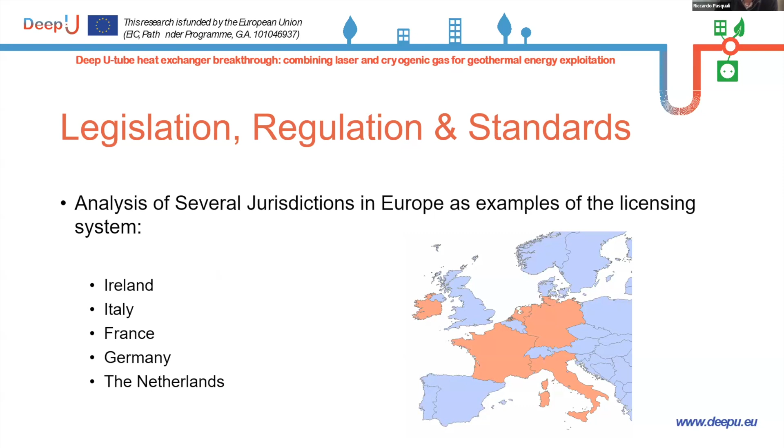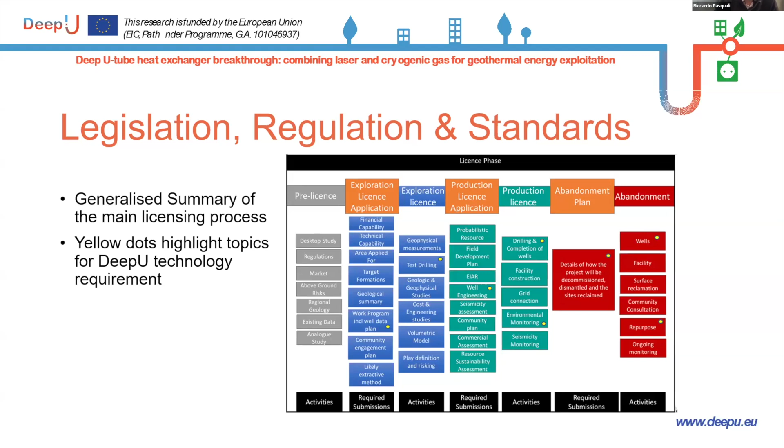I'm not going to cover all of the aspects, but you can see in the orange boxes there is exploration, production, and abandonment. As part of exploration and production, there are significant components related to well planning, drilling operations management, well engineering, test drilling, and then obviously completion and environmental monitoring during the course of the drilling operations and the production aspect, as well as abandonment once the system is complete. So it was very key for us to understand these broad lines of processes, and then look as the project evolved and the DeepU technology evolved, how do we fit in there?

Environmental health and safety indicators were one of the key items we wanted to consider. You can see here this diagram from the UK HSE showing lagging and leading indicators. The point in relation to this diagram is we need to define, as part of nearly all of these new innovative technologies that you've heard talked about, particularly by Kevin this morning, but more importantly for DeepU, you need to provide these leading indicators that are on the right-hand side of the screen.

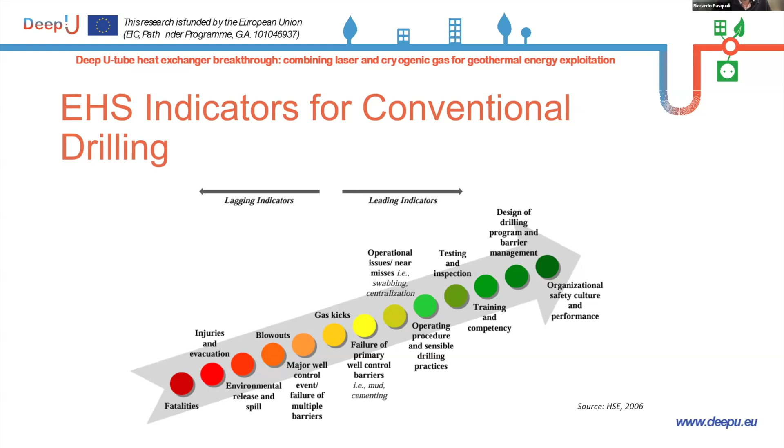So you need to be able to provide operational procedures and sensible drilling practices that are accepted and recognized by legislators and regulators, with a system that minimizes your response-related indicators, which are down on the left hand side - you can see gas kicks, blowouts and so on highlighted there. So if we take those high level topics and compare what is available in terms of conventional drilling and the DeepU methods, the DeepU processes, which I will come back on in a few minutes.

For example, the operational health and safety practices associated with DeepU, I'll talk about the processes in a minute, are present because the various industrial processes being put together to form the DeepU technology are regulated and have good health and safety practices, but they are not necessarily regulated or set in the context of a drilling environment. So there is some work yet to be done on those.

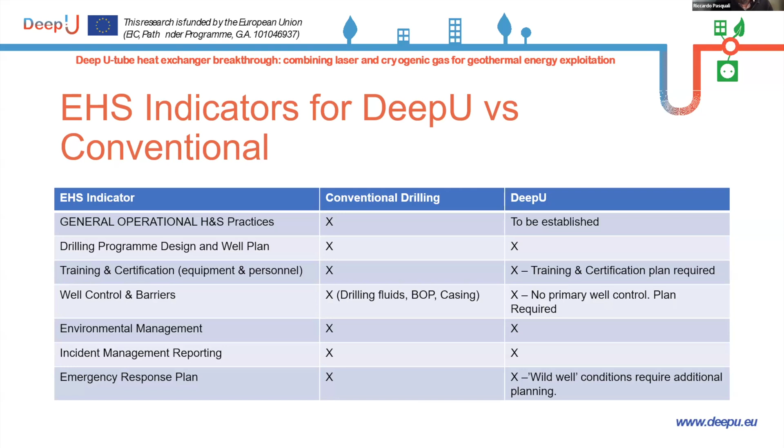In terms of the nitrogen system, there are operational procedures for how it will be used and stored on site, and how the process will integrate into the drilling and flushing. There are also some optimizations to be done in terms of defining the right method for separating the cuttings.

And considering the emissions, you've heard today from Pavel some of the sizes of the drill cuttings that would potentially be produced. So a dedicated system would have to be developed as part of this.

In terms of the drill string, there's obviously a very innovative design that you saw in the last presentations of how the drill string is put together, how the connections are implemented, and what the materials and specifications are for that drill string prototype. So there is a certain amount of certification and standardization required to align it with the broader deep drilling sector.

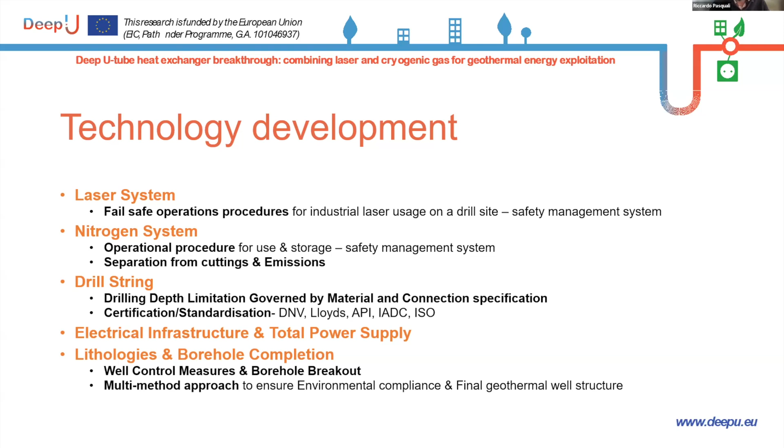So all of these are items that are still being considered and will be refined towards the last part of the project. I can see that the time is racing on, so this is my last slide, Antonio. Maybe I'll stop sharing now.